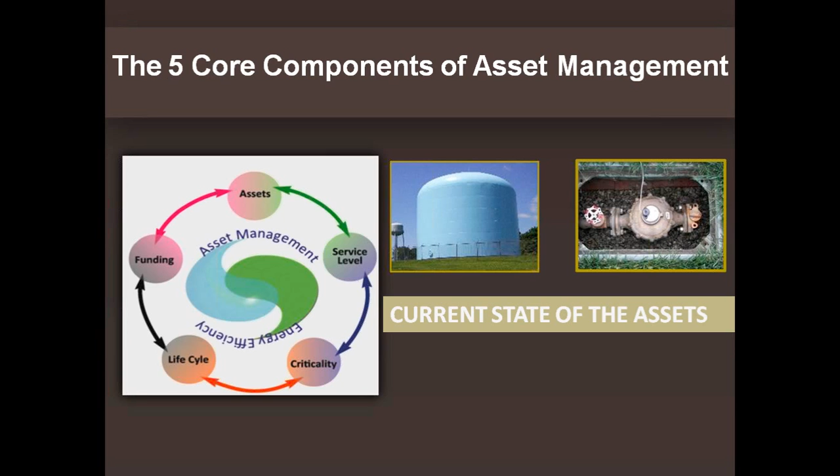And the good part about asset management in the methodology that we're teaching is it builds on what you already know about your system. And you already know quite a lot about your system between all the people that work there now or the people who've worked there in the past that you can tap into and all the other information you have. There's quite a bit that you already know. And we want to start from there. We don't want to start all over again from scratch. We want to start from where you're already at.

It's also a very common sense approach, so it shouldn't feel very foreign to you. It should feel very natural, and you may even think to yourself, you know, I do a lot of these kinds of things already. And that's probably true. It's maybe just a different way to think about those things or a different way to package them up, a different way to get information out of what you already do to make better decisions.

It also helps you operate each asset in the most cost-efficient manner, and this is where we get into what should you do in terms of operation and maintenance with each asset? What do you want to do with repair, replacement, rehabilitation of all of your assets? It's also a way to try to change your operation from a very reactive operation, which is pretty common for most utilities, to a more proactive operation. So instead of reacting to every problem that occurs, every crisis that comes up, you can be much more planned and try to have your activities be preventative in nature rather than corrective in nature.

And finally, a focus on understanding and managing risk. That's pretty much the essence of today's webinar, to talk about how do you understand the risk of your operation, the current operation? How do you manage that risk? There will always be some risk to an operation, and how do you decide how much risk is okay for your organization?

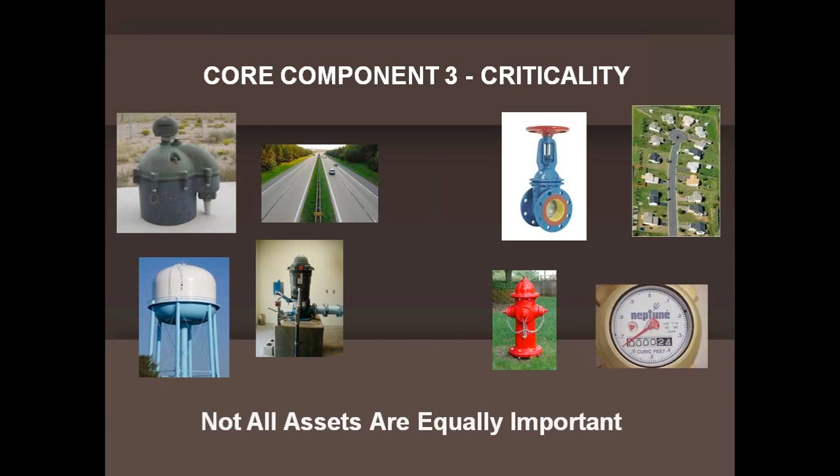So the most important thing to think about when we talk about criticality is that not all of our assets in our system are equally important to us. Some are going to be way more important than others. So I have a couple of different pictures here, and the pictures on the left are assets that potentially could be more critical to your system. And this is very system specific. So your system may be very different, but here's the types of assets that might be critical.

So for example, if you have a well and it's the only well serving your community, that could be very critical to you because if you lose that well, you're not going to be able to serve water. Similarly, if you have a storage tank and it's the only storage tank for your system, that may be a big problem for you. It would be a very critical asset because if you lost the storage tank, maybe you lose the ability to meet peak demands, maybe you lose fire flow, you might lose the ability to provide sufficient pressure to some of your households. So that could be a very critical asset to you.

A pipeline that goes underneath a major highway could be a critical asset because if that asset failed, it might cause a lot of trouble on the highway. And finally, a pump. Suppose you only have one pump and that pump is necessary to supply your whole community. That pump could be very critical. On the other hand, if you have something like a cul-de-sac and a water line serving a cul-de-sac with a few houses, that's going to be a lot less important to you because if that pipeline fails, a few customers are out of service, but it's a lot less than having a highway collapse or something like that.

Or a gate valve. If you have many gate valves in your system and one particular gate valve fails, you just go a little bit further down the street and shut another one off. Hydrants, similarly, if you have a hydrant failure but you have hydrants spaced fairly regularly throughout your system, one individual hydrant failure may not be a problem. Or a meter, same kind of thing.

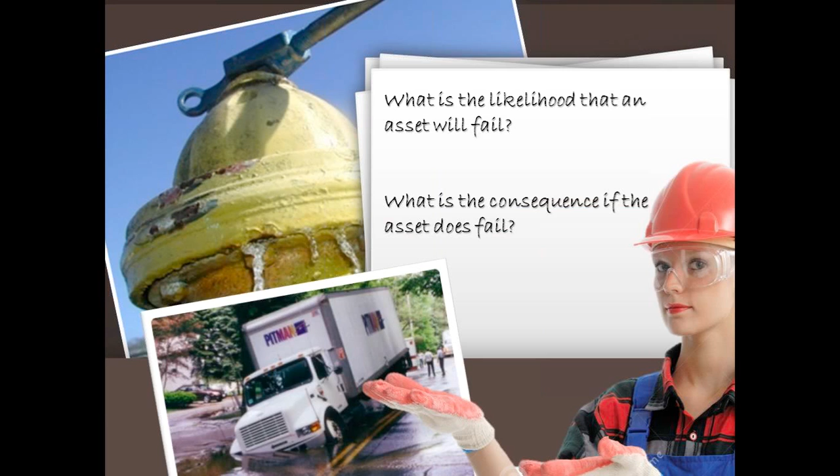So now we're going to listen to a video from Eric Saylor from Cincinnati, Ohio. And again, because we had trouble streaming the video portion, we're only going to listen to the audio portion. So Don, if you would, play the audio.

I think on the collection system side, we were, up until about 10 years ago, totally reactive, and when CMOM, that phase started coming into place, then we truly became more proactive. And then we were finding a lot of our problems, collapsed pipe and et cetera, that we didn't even know were there. But then where we needed to take the next step was implementing the asset management program; there was no prioritization of that proactive work.

We were treating our major interceptors with just as much importance as an 8-inch sanitary line in a cul-de-sac. And if you're living on the 8-inch sanitary line in the cul-de-sac, that is the most important thing to you possibly. But as a whole, as managing a department and managing your assets, you have to treat those differently. And so one of the first things that we did on the collections side, under the strategic plan, was to form that risk task team.

And that risk team, their mission was to help us develop that criticality of the assets. What are our priorities as far as our maintenance goes? To be proactive, but yet to be logical in the proactive nature. And then in turn to develop that probability of failure, so you can then properly prioritize your capital investments.

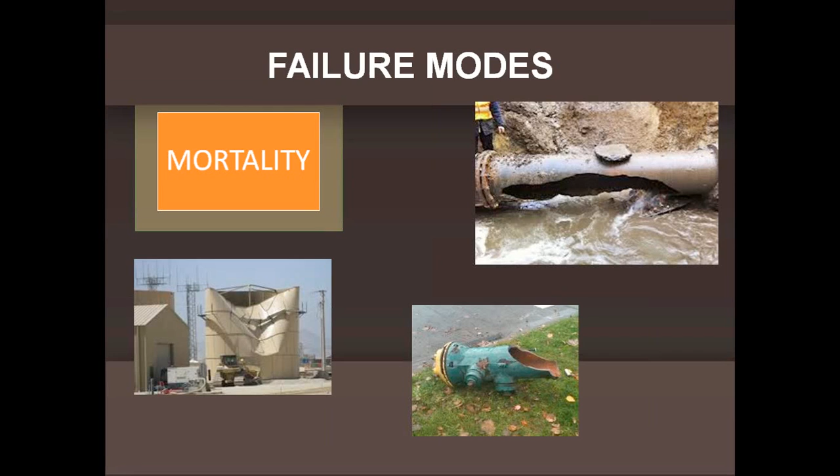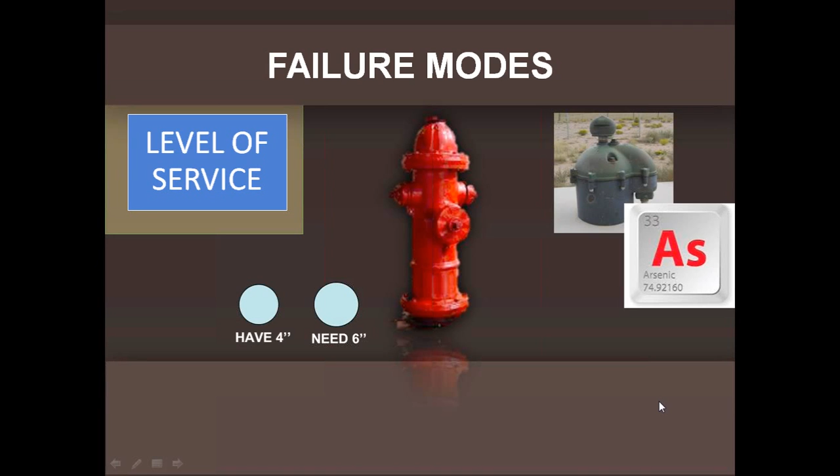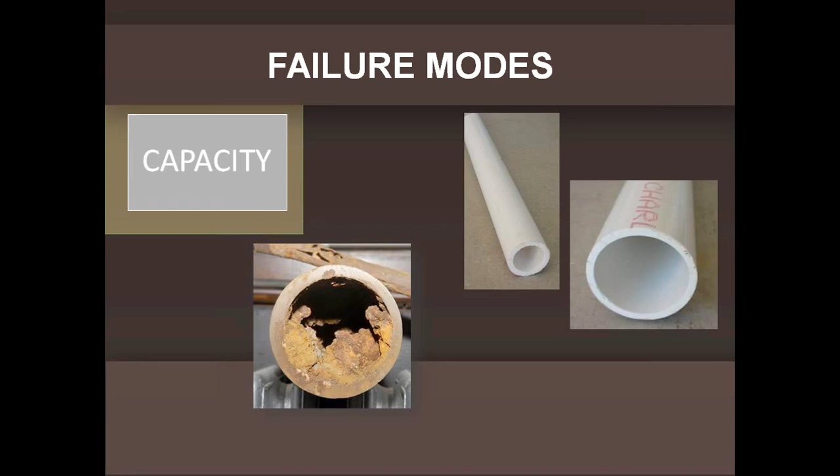So on the failure side, there's actually 4 different ways that assets can fail, and it's important to remember all of these different ways. The first is mortality failures, and these are the most common kinds of failures that we think about, and usually when we think about asset failures, this is what comes to mind. And I have some pretty dramatic pictures there. Mortality failure can also include things like leaks or stuck valves or anything like that. This is when something physical happens to the asset and it's failed because of a physical problem.

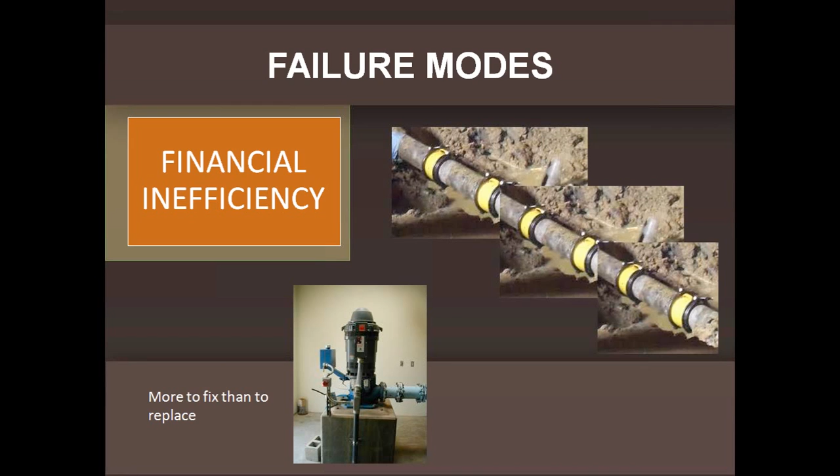A level of service failure is more related to a change in regulations, a change in customer demands or desires, something like that. So in this example, maybe you have a community that has 4-inch pipe right now. They decide that they want fire flow, and they're going to have to go up to 6-inch pipe to get it. So maybe the 4-inch pipe is in good shape, but you're going to have to replace it anyway to allow for fire flow.

Or a well that maybe has arsenic in it. Prior to the arsenic standard changing, maybe it was fine, but after the standard reduced down to 10 parts per billion, the well was no longer able to be used. So even though the well might be producing water, and maybe a lot of water, it may be considered a failure because it no longer is able to meet the level of service, the regulatory requirements. So you may choose to take that out of service and get a well that has lower arsenic, and we would call that a level of service failure.

You can have capacity failures. This is where the asset is not able to deliver as much flow as you want. So maybe the pipe size is too small and you need a bigger pipe size. Maybe you have some corrosion inside the pipe that's reducing the ability of the pipe to deliver water. So maybe the pipe itself is in decent shape, but it isn't able to deliver the capacity, or maybe a well isn't delivering enough water, or a pump, whatever the case may be, but you're not getting enough flow out of your asset.

And finally, we have financial inefficiency. And this is where we're spending too much money to continue operation and maintenance, and it would be cheaper for us to replace the asset. Generally speaking, it's cheaper for us to maintain an asset than replace it, but there comes a point where that's no longer true. And I kind of doctored this picture up a little bit, but consider a piece of pipe that maybe you had to go back each time and clamp it again and again, and you'd see 6 different clamps there on a little piece of pipe, and you'd say, okay, well, that's probably at the point where we could have replaced that pipe rather than clamping it. Or maybe you have a pump that you're going back to repair over and over and over again.

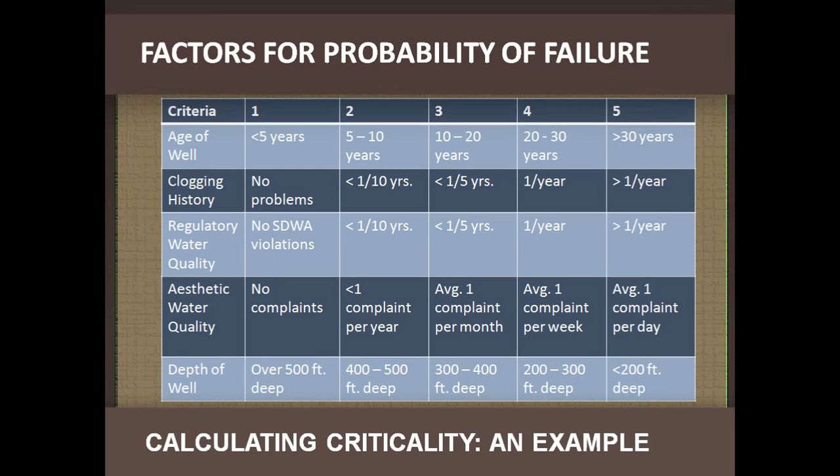So how might we address or assess criticality? There's all kinds of tools that can be used, from very, very simple to very, very complex. So the simplest tools would be something like a very basic ranking of all of your assets to say, okay, from a 1 to 5 scale, we're going to say what the probability of failure is for each asset on a 1 to 5 scale and what the consequence of failure is on a 1 to 5 scale. Then we'll do an assessment of redundancy, and we'll multiply that out. That would be a very, very simple criticality analysis.

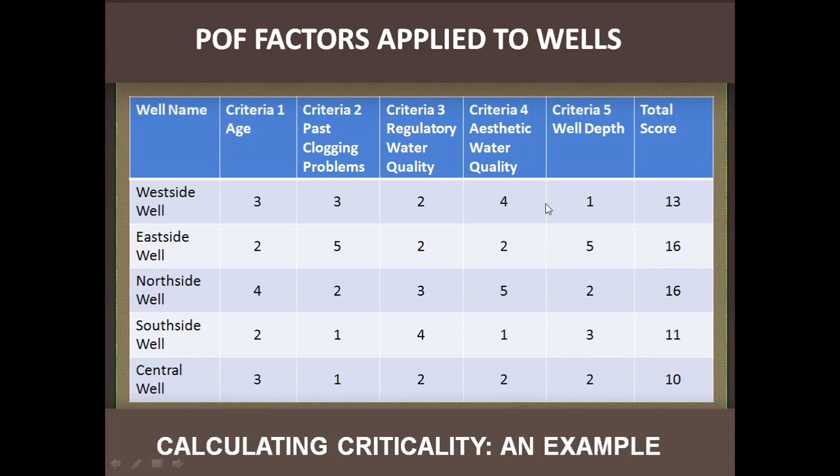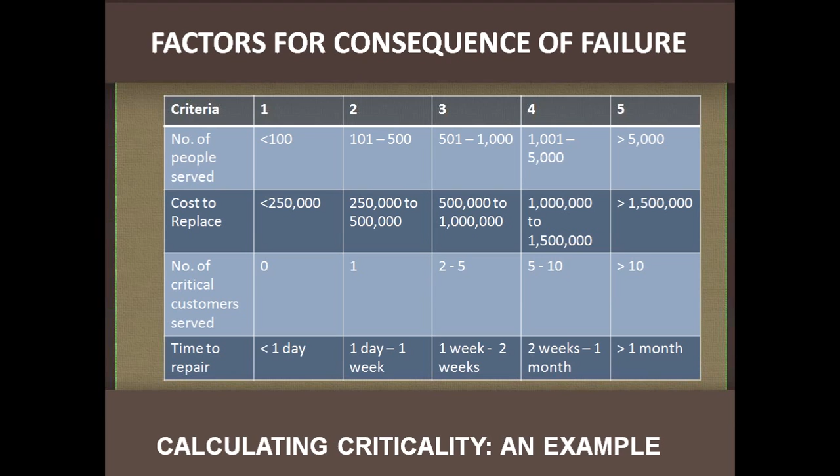Going up to the higher end, we'll start looking at factors that affect failures, factors that affect consequences. We'll give many factors, maybe rank each asset on a 1 to 100 or a 0 to 100 scale and see how they rank. So there can be some very sophisticated ranking systems, again, down to very simple ranking systems. And you can always start with a lower level ranking system and build up to something more advanced later on. So you can start simply and then build up.

I'm going to show you just an example of how it can be applied in a fairly simple case. And we'll just take one asset class. So when I talk about an asset class, I mean wells or pumps or tanks. We're talking about one specific kind of asset. So for this example, we're saying we've developed some factors for probability of failure, and we're saying that several things go into how likely it is that a particular well might fail.

So for example, the age is one factor, clogging history, regulatory water quality, which is more of a level of service concern, aesthetic water quality, which again is a level of service, and depth of well. And in this particular example, we're saying that they're having more trouble with shallower wells than deeper wells. Again, these are very system-specific issues. This is not something universal. You would pick your own factors and your own criteria for how you would rank things.

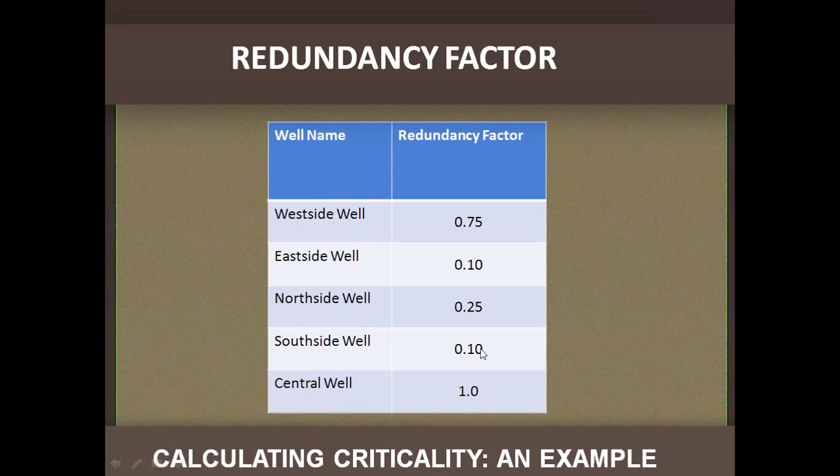And then we can apply those factors to each of the wells. We're saying this particular community has 5 wells, and so each one is ranked according to those factors. And we've done a very simple across-the-board ranking where we're saying that each of these factors has the same weighting. You may decide that past clogging problems is the most important factor in terms of whether or not the well has failed. So you might want to make that twice as many points. Or you might say that regulatory water quality is most important. So in this example, we've left it all equal, but you can change that and you can give weighting to different factors.

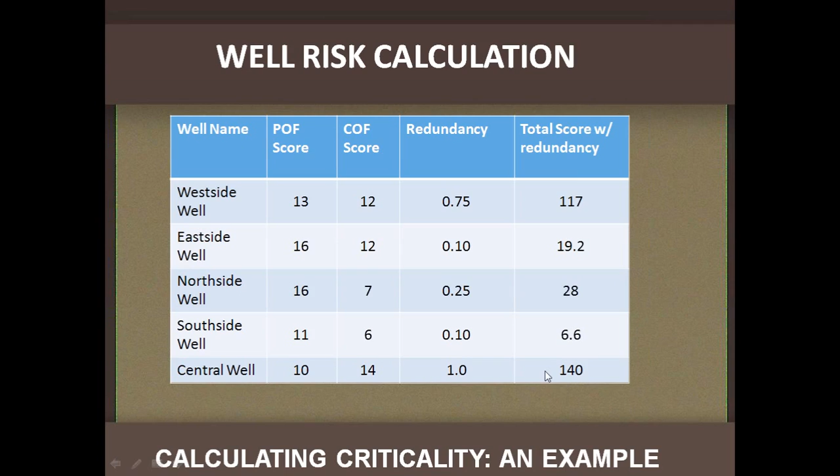So then we do the same thing for consequence of failure. And in this example, we've done things like look at the number of people served, the cost to replace the well, number of critical customers served, time to repair. And we've said those would rank 1 to 5. So again, we applied even weighting to all of those factors, and we come up with a score, a total score for the consequence of failure.

Then we want to look at redundancy. And I've just developed some of my own rankings for what I want different redundancies to be. So if there's no redundancy, it's a 1, meaning that we're not going to reduce the risk at all. And then you can apply pretty much whatever scores you think are the best way to do it in terms of different types of redundancy. The one thing to remember, though, is the score for 100% or higher redundancy never goes to 0.

Because no matter how much redundancy you have in your system, you can never guarantee that a redundant asset is going to perform, because the same condition that might have caused the first failure may cause all the assets to fail. And there's plenty of examples of that in non-water settings where the Fukushima plant over in Japan had a triple redundancy for its electrical power, but all 3 of those power sources failed. We had the plane that went down in the Hudson River; it had redundant engines, but both engines were affected by the same problem. So again, we never want to give it a 0, but it can be a pretty low score if it's 100% or higher redundancy.